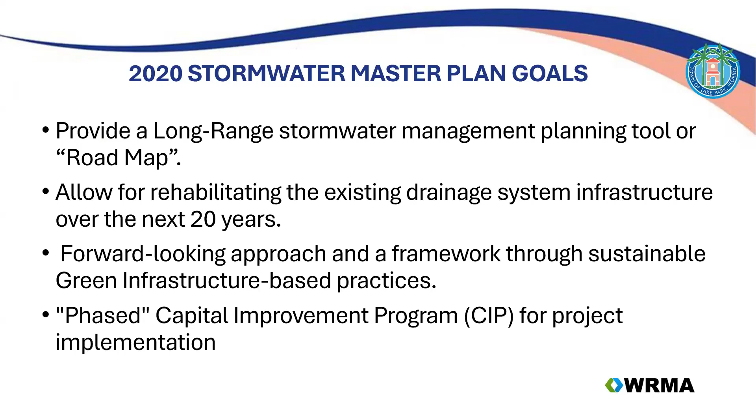Our Stormwater Master Plan aligns with the EPA's G3 initiative, which stands for Green Street, Green Jobs, and Green Town. By investing in Green Street, we modernize our stormwater infrastructure and create new opportunities for economic growth through green jobs. These jobs focus on sustainable practices like eco-friendly engineering and landscaping, which helps drive initiative within our community. Furthermore, the green infrastructure we're implementing will make Lake Park more resilient to climate change, preparing us for the impact of rising sea levels and more intense storm events.

One of the biggest challenges we face is funding. With a small population of about 9,000 residents, our ability to expand the stormwater utility fee is limited. Our general budget is already allocated to essential services like community services, library, and infrastructure management, so we need to be creative in funding stormwater improvements. To address this, we are exploring external funding options, including state and federal grants. By doing so, we can finance critical stormwater projects without straining the town's budget, allowing us to meet our goals despite the constraints.

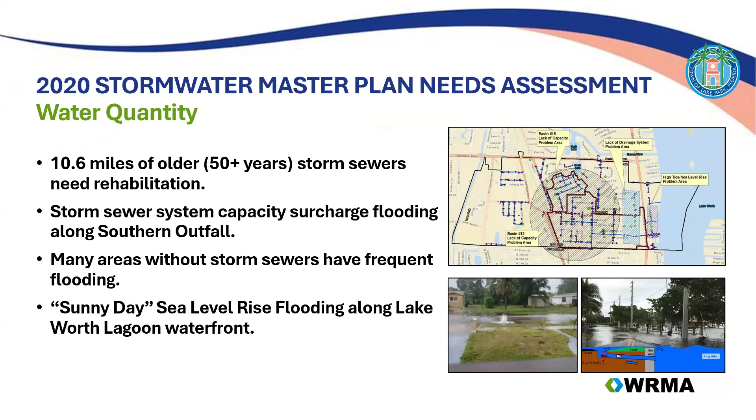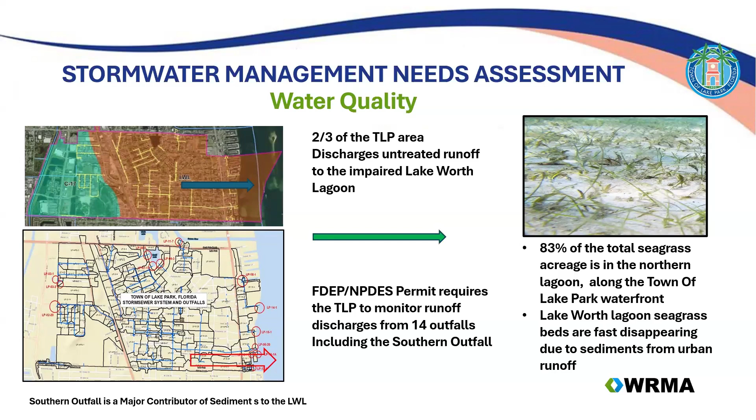The town belongs to the Palm Beach County NPDES MS4 group, has 14 outfalls that are monitored, and the town has to file a report every year.

So now let's take a look at other issues like climate change. As I mentioned, the town is already impacted by sea level rise, so this is very important. The prediction by the compact, the 4 counties in South Florida plus NOAA, indicates there will be a 42-inch increase in sea level rise by the year 2070.

The predictions are that by about 2035, there will be an increase in precipitation intensity of about 20-30%, roughly anywhere between 2 to 7% per year.

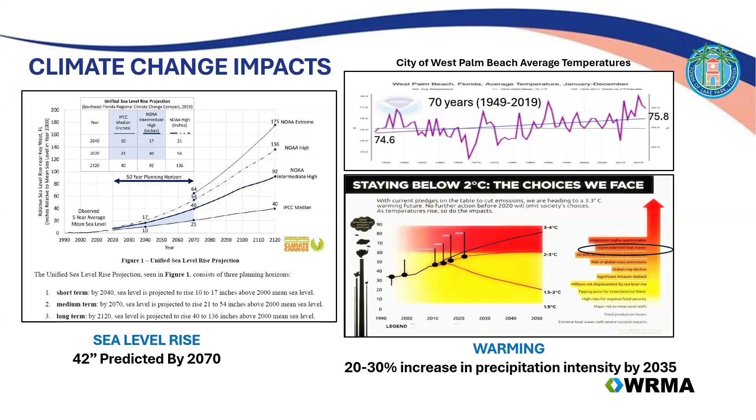Why is this important? Because in any stormwater master planning design, you take into account the flood level of service. Typically this is a 5-year, 24-hour storm for most municipalities. For Town of Lake Park, using the NOAA Atlas 14 database, we see that this is 7.47 inches.

Now if we were to take the projection for the next 11 years to 2035, let's say at 7%, the 7.47 becomes 8.24 inches. Looking back at the table again, that becomes a 7.5-year, 24-hour storm event, meaning that basically every 10 years your design goes up 2.5-year frequencies.

That means by 2040 and 2050, you'll be designing for the 10 or the 15 year storm. Well, that means all municipalities would be upsizing frequently. That is unaffordable and unsustainable.

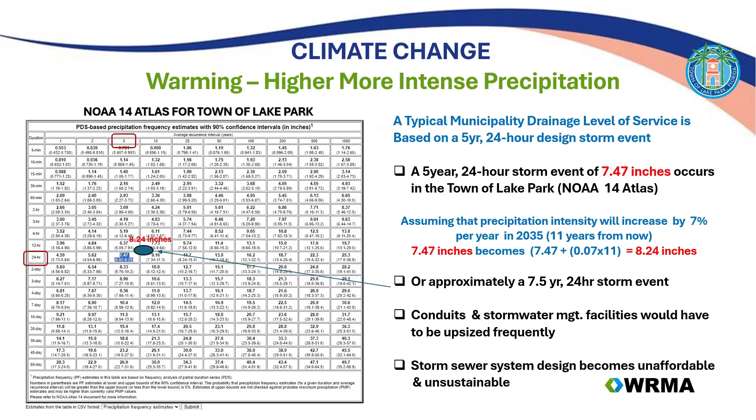So what we proposed at the time was based on our experience with best practices in Maryland. Both Michael and myself had implemented green infrastructure for the Washington Suburban Sanitary Commission, WSSC, as well as DC Water, and we wanted to take some features from there and apply them to South Florida.

One of the things that caught our attention at the time was something that the Maryland Department of the Environment, MDE, is doing for development and redevelopment projects. They call it Sustainable Environmental Site Design, or ESD. The idea is to select a site, a small area within your project site, and retrofit it to a more natural condition.

That is done by targeting the rainfall to reduce the site's developed RCN, the curve number, from whatever it is to woods in good condition, let's say from 85 to maybe 65 or 55. You come out with a volume, and then apply green infrastructure, either on the surface or on the groundwater with biodetention chambers.

The idea is that if you were to do that on a watershed basis, you keep up with climate change and the precipitation increases. I've put a link to MDE at the bottom for those who want to learn more about the ESD approach.

Because the town had a difficult situation, they had no ability to come up with the funds to pay for upsizing all the storm sewers. We felt we could propose a sustainability approach that we were experienced with in Maryland, and because Florida has such good sandy soil conditions, it felt like the right thing to do.

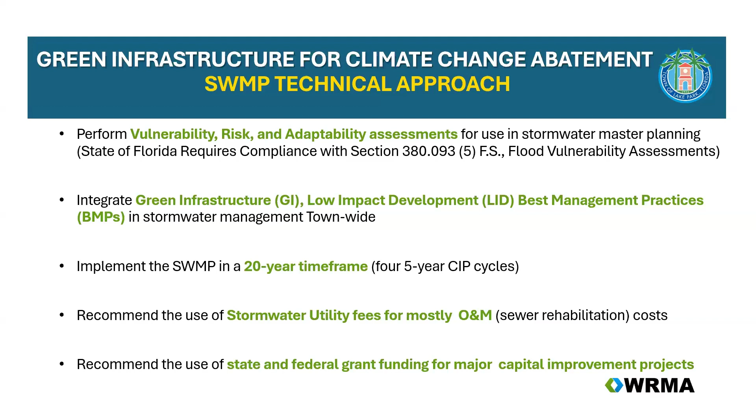So how do you go about implementing GI and LID BMPs for sustainability? It's a definition of green infrastructure, like Dr. B mentioned in his presentation—a small scale practice close to the runoff source. The whole idea with green infrastructure is to not let that rainfall that becomes runoff leave the site. The minute it leaves the site into the gray infrastructure—the storm sewers and the end-of-pipe system, pumps and detention areas—you lose half of the battle.

So that leads us into the flood vulnerability and risk assessment. In every stormwater master planning, you perform a level of service modeling analysis. But the difference with our approach is that you have to start with the vulnerability to climate change—as a function of climate change, assessing what sea level rise and increasing precipitation would do to your watersheds. Then once you know that, you apply it at the local level with nuisance flooding. This is incredibly important because small scale practice and nuisance flooding go hand in hand, and I'll explain.

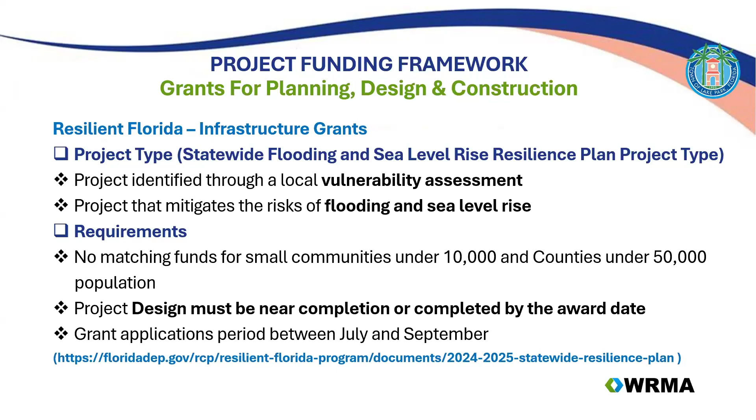Small communities under 10,000, like the town of Lake Park, don't have to match, in counties under 50,000. Also, the project design must be near completion or completed by the award date. As I mentioned, it was created by legislation in 2021 to protect coastlines and shores and as a defense against sea level rise, but it also applies to any flood and sea level rise issues you may have statewide.

Again, hundreds of projects have been proposed. In the 2024-25 cycle, 196 projects were proposed and deemed eligible at a total of $1.8 billion, of which almost $900 million were approved. This is a very reliable source for implementing a plan like this.

So let's go and see how the town did this. I mentioned the three levels: vulnerability, nuisance flooding, and flooding. Let's start with the first - how did the town go about climate change? The town got a $75,000 coastal resiliency grant to perform a sea level rise assessment, and we hired a surveyor to assess the elevations on the 0.8 miles of seawall, the structural conditions, and what it would cost to replace it.

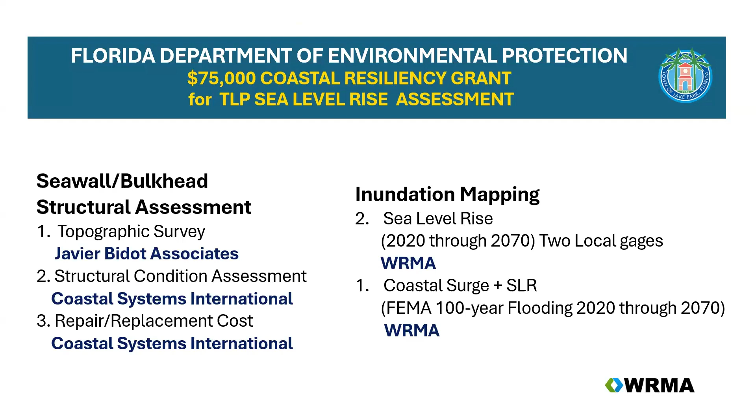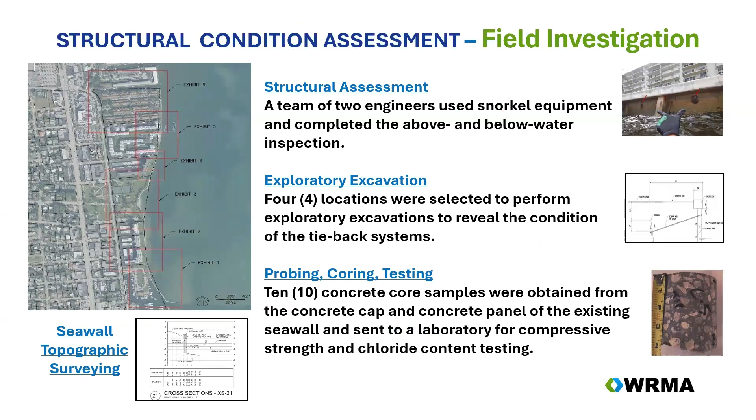We also performed inundation mapping along the lines of what the state requires right now, from 2020 to 2070, using two local gauges and merging coastal surge with sea level rise. As for the seawall, they did a structural assessment, exploratory excavation, and probing, coming out with a cost that I'll mention later.

We also comply with Section 380.093, the flood vulnerability assessment. This is very specific - it requires two local sea level rise projections, called NOAA Intermediate Low and NOAA Intermediate High, used for two planning horizons: the year 2040 and 2070. It's changing this year - I believe it's going to 2050 and 2080.

We did that, and what we came out with is we combined the two sources. The typical approach used for coastal surges - you're not going to go with a model, because that's done by other consultants using much larger budgets.

What you do is take the static water level of that incoming wave - in other words, discount the velocity side of it - and add that to the sea level rise to make a projection of how far inland that would go. You can see from the map on the right that it will go a long way, all the way past US 1 into 1st and 2nd Street, and on the north, all the areas around South Lake will be flooded as well.

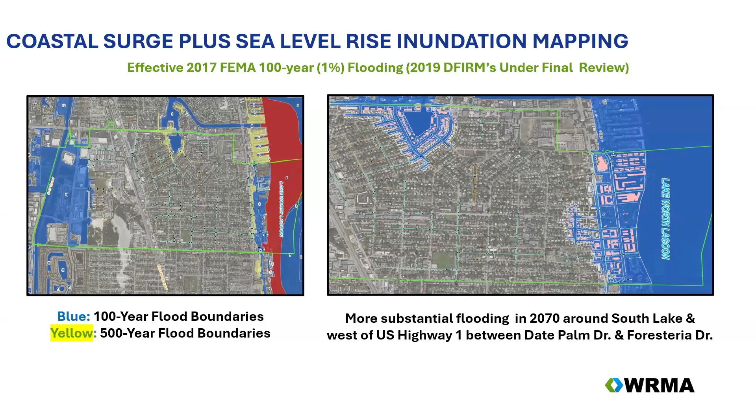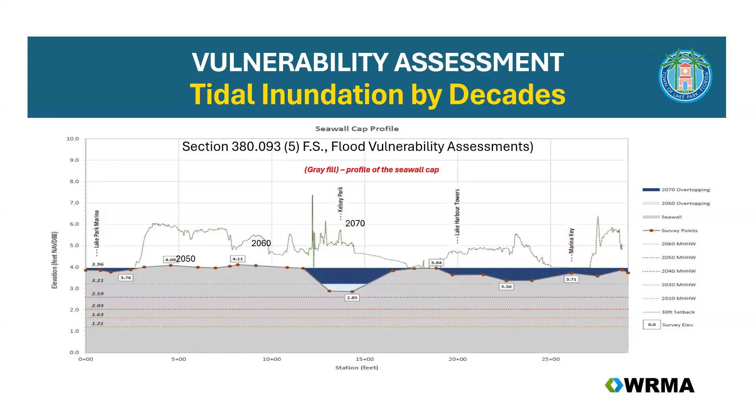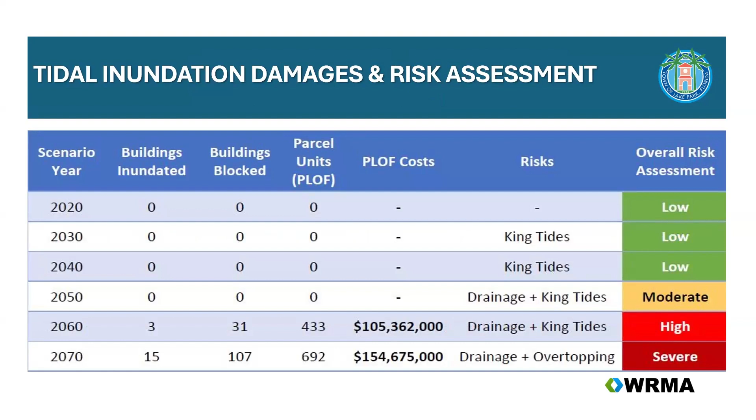Then you have to put this in terms of how much damage there would be, what the risk is, and provide the overall risk assessment from low to moderate to high to severe. Once you do that, you're required to come out with an adaptation pathway - what are the options you have?

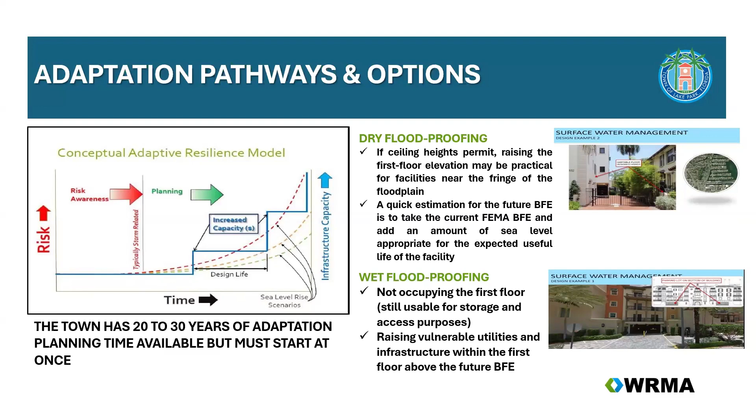The town has another 20 to 30 years until 2050 to start doing something, but they already started. You're going to elevate the first floors and make parking lots, maybe elevate the seawall - most people do that. In terms of stormwater master planning, how do you address all those 14 outfalls that go to the lagoon?

You put floodgates, and if you put floodgates, you need pump stations - sea level rise pump stations. The town has already done that. The two required: one to the north was done as part of the Lakeshore Drive Drainage Improvement Project, and the one to the south will be done as part of the Southern Outfall Phase 1 Priority Retrofit Project, which I'll mention in a second.

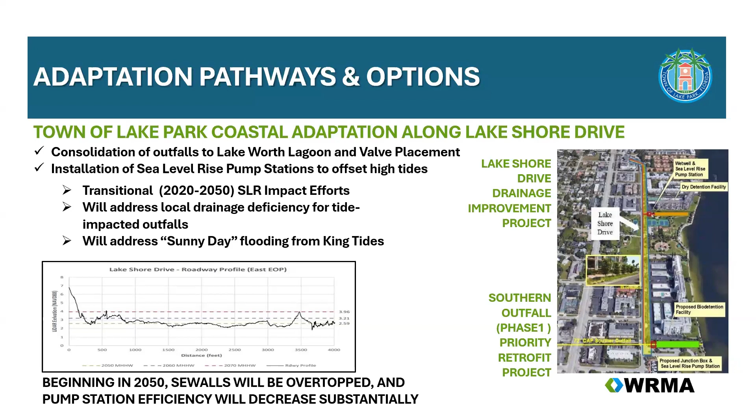But notice on the lower left that even by 2050, that will not be enough, meaning the town is going to have to elevate Lakeshore Drive to stay dry.

So now let's address the other approach in the level of service, which is the local level nuisance flooding. This is the key of the program because small scale practice and green infrastructure and nuisance flooding go hand in hand. I'll also address the third one later.

When we started the project, one of the tasks in Stormwater Master Planning was outreach and communication. This task involved forming a 5-member steering committee made out of the town manager, the public works director, the WRMA staff, and stakeholders, because we needed to find out what people know about sea level rise, green infrastructure, and all those terms that get thrown around but not really put into practice.

We sent surveys, and it was very informative, both to the managers, the commission, and to us, as to the level of learning that needed to be done.

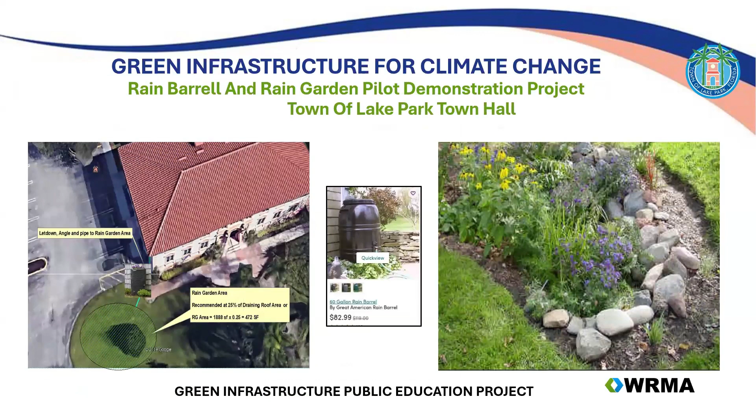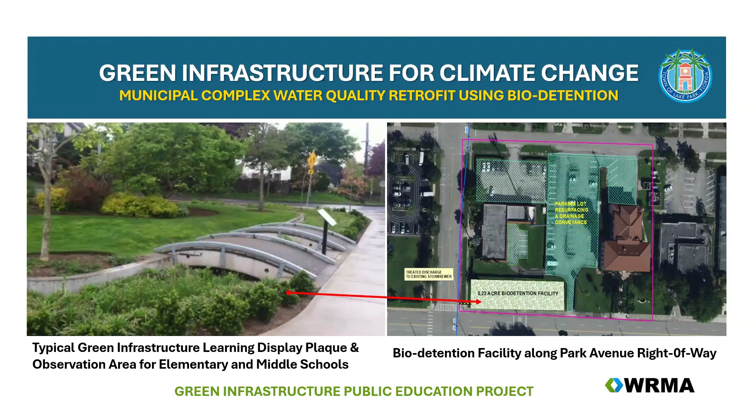What came out of that were recommendations to implement projects. One is in the works: take the building where the commissioners meet and put rain barrels, bringing that to a rain garden right in front by Park Avenue, where people will see it. Another is to take an area in the municipal complex fronting on Park Avenue and create a biodetention facility with a learning display and observation area for elementary schools and children, even high school, to learn about green infrastructure and sustainability.

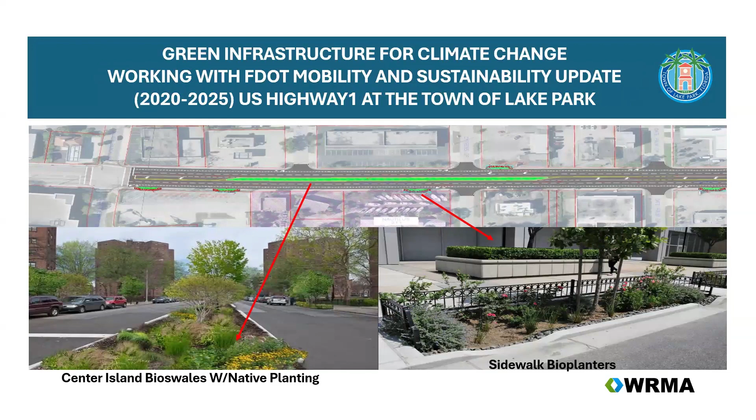We're also working with DOT. They're doing a mobility study improving US 1 through the town, and we're talking to them about putting bioplanters on the sidewalks and bioswales in the through lanes.

So here comes the key: how do you implement green infrastructure townwide and make it effective? I mentioned earlier that the key is not to let the runoff come off the site. So if it does come off the site after you put in bioplanters, it's going to hit the road and try to get into the system.

So the idea is to try to do something in there. What we came out with is the ability to convert 10% of the impervious areas in right-of-ways and parking lots to green infrastructure over the next 20 years, to offset this warming trend. We figured out that if we took 5% of the right-of-ways as a target, we would get there, and we then modeled that to see if it could be done.

What we propose is not just to use the swale and convert it to a biocell, but convert it to a hybrid biocell, something we had applied in Maryland. We thought it would be really useful in Florida because unlike Maryland, where they have a lot of clay soils, here you're underlain with a tremendous amount of sand, especially in Central Florida. This will work extremely well. The idea is to capture the first inch of runoff, or a good percentage of it, and let it infiltrate to the water table.

When you do that, you're also offsetting the discharge to Lake Worth Lagoon, which means improved water quality. We modeled this using the SIMPLE NPS GIS-based model, the SWAT distributed model for pollutant loadings, and the UCF BMPTRAINS tool to assess the effectiveness of those BMPs. We found that it would decrease sediments over the 20-year period by 22.2% into the lagoon. The Palm Beach group and the Lake Worth Lagoon people were ecstatic about it, and they really liked the program, along with all the other pollutants that would be precluded from reaching the lagoon.

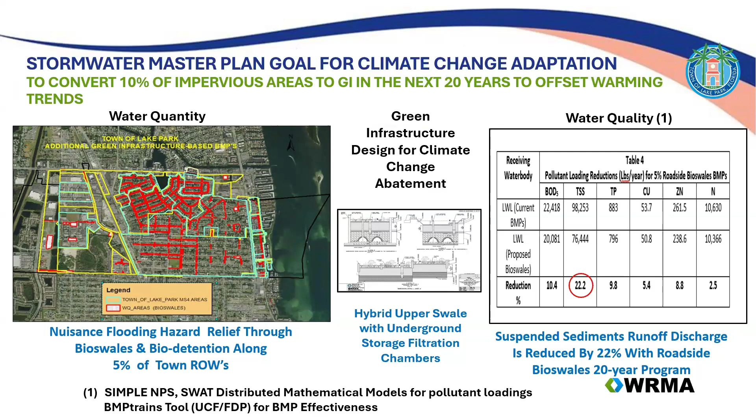As Dr. Bean indicated in the previous presentation, 90 to 95% of all storm events in Florida occur between 0 and 2 inches, most of the time about 1.5 inches. You get a 10-year or 5-year storm once in a blue moon, but the frequent events are right there, less than 1.5 to 2 inches.

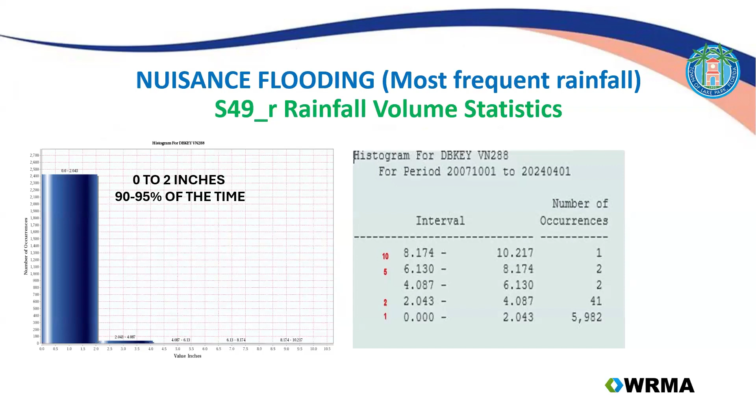So how then do you bring the concept into practice? We strongly recommend that you use a 2D modeling approach. 1D links and nodes doesn't cut it. You have to do your profile on plans.

When you see it in 2D, you take a high resolution, either mobile lidar with mesh or high airborne lidar, and create a DEM and issue that to the model.

It will tell you for the 0.5, 1 inch events, where is that nuisance flooding occurring. You can see from the map it's very clear. And we knew already, for example, that along 2nd Street, it was very clearly a place where we needed to do that. So when you do the modeling, you get with your stormwater superintendent, John Wiley from the town, and ask where is your documentation of this nuisance flooding.

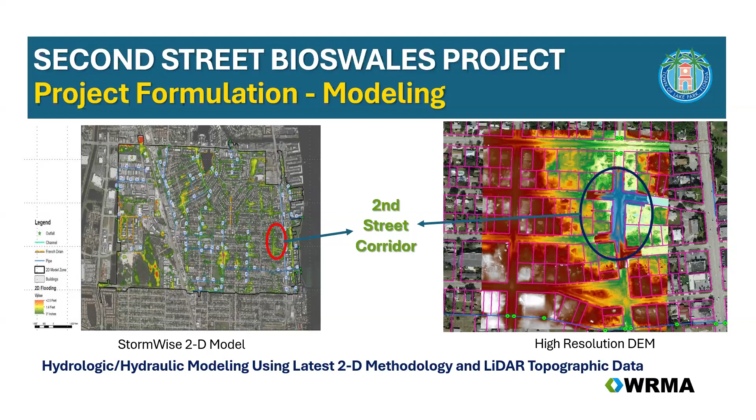He came out with about 32 locations. So right there, you go from mathematically supporting your technique to documentation of where it happens. And then you have a list of projects you can use in the future, small scale projects to implement green infrastructure. Now let me go to the flooding level of service, the basin level of service.

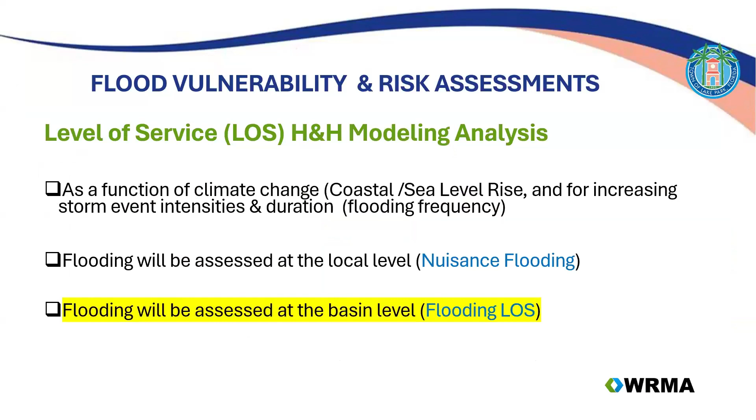A lot of engineers believe that you cannot use green infrastructure for larger projects. I don't quite agree with that, because if you selectively apply it, it would work. Take the case of the southern outfall.

This is roughly about 500 acres, and they have a north and a south tributary. They basically join right at 6th Street to go out into the main trunk and go from there to Tidewater, but they can't get there because of the improper sizing and the issues of surcharges. So we came out with basically a 3-level approach, 3 phases within one project.

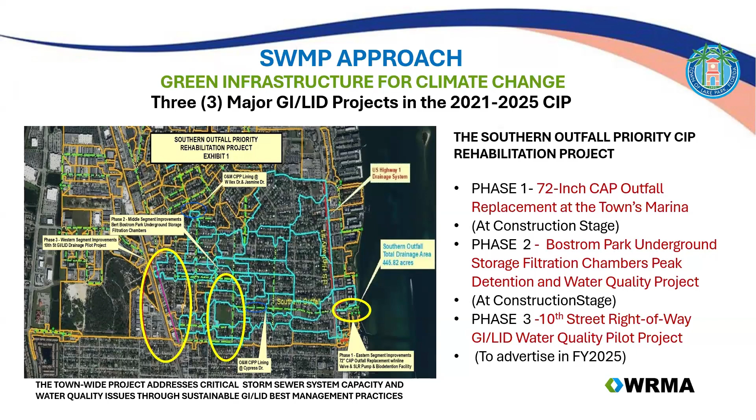One at the marina, at the outfall discharge, one in the center, which is Bostrom Park, which Michael will address in more detail, and one upstream of the watershed, where there's no drainage for a right of way. I'll quickly mention this.

Here is the marina where there is a 72-inch CAP aluminized pipe that is deteriorating and needs to be replaced. It's being replaced as phase one of this project with two 60s, and they're going to have exfiltration trenches along the US1 area, and very importantly, a future sea level rise pump station.

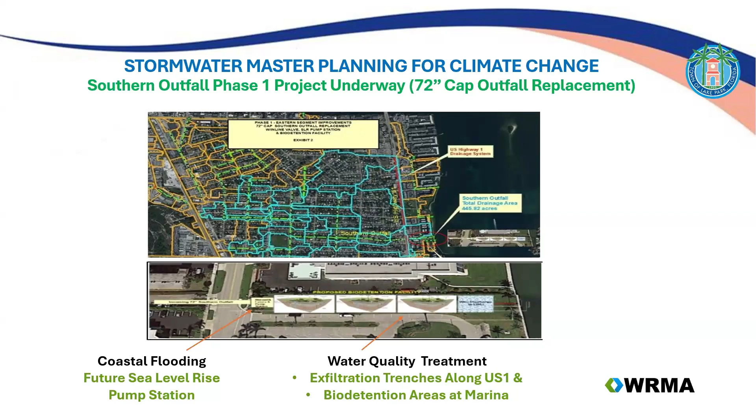So what do you have? You have the three components: water quantity, water quality, and sustainability, because again, you're offsetting sea level rise.

The second project is Bostrom Park, which again, Michael will provide more details on. Basically here, you can see from the pictures that most of the northern tributary gets stuck basically along 6th Street. It cannot get to the outfall. So we needed to improve that connection and put it underground.

There were no locations in the town to put any kind of surface detention. So on the ground of the park, the 3-acre park, was the way to go, with large chambers. And there comes the green infrastructure sustainability approach.

Detain the peak flood by about 20-30 minutes. Let that peak pass by on the ground, and infiltrate that volume to the ground while it's doing so. And you're also doing what? Water quality - you're preventing that from reaching the lagoon. So again, it has water quality and sustainability.

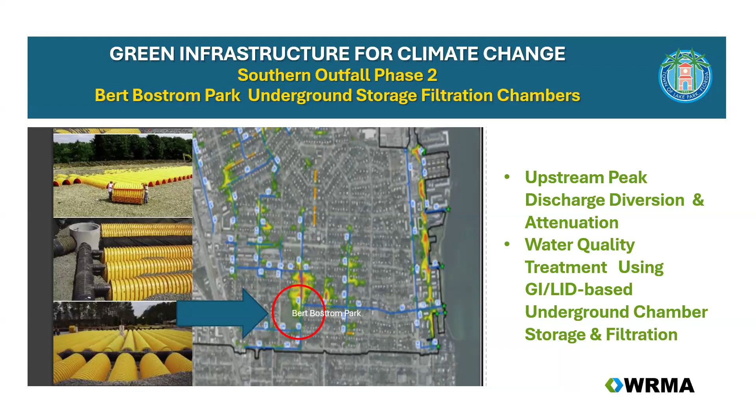Basically, all the entrances to commercial communities would be pervious pavements, and then we would have some bio-detentions going into these chambers. Again, you are now dealing with a situation where you have all three components: water quantity, water quality, and sustainability.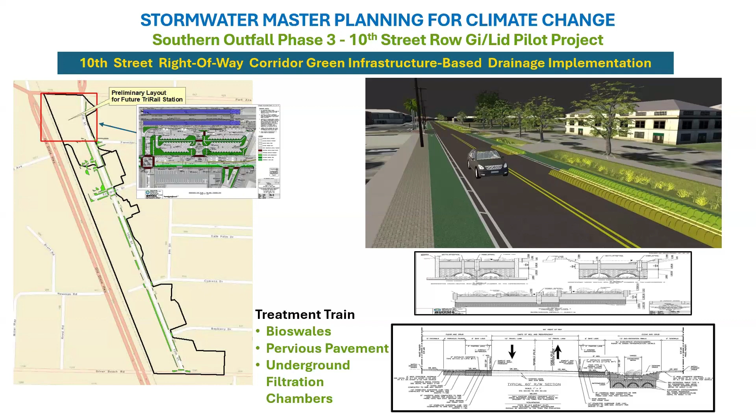Before I turn it to Michael, I want to indicate that there are some key individuals, including Jamie Morales, the capital project manager, and John Wiley, the Stormwater Superintendent for the Stormwater Master Plan, who have been instrumental on the implementation side of this program.

It wouldn't have happened otherwise. It's great to design it and put it on grants and paper, but another thing is to implement it. They're doing a great job about that. So now I want to pass it on to Michael.

Thank you, Raul. Slide please. Yeah, so as Raul mentioned, one of the things the town of Lake Park is trying to achieve is converting 5% of its right-of-way into green infrastructure.

In this case, the project that I'm going to talk about here is bioswales. This street was a street that we had identified in the two-dimensional model as having a localized nuisance flooding issue. There was no existing stormwater infrastructure within 3 blocks.

The nearest connection point would have been the southern outfall, which, as Raul previously mentioned, is an outfall that's already at pretty high capacity, and we're not looking to add any additional flow into that outfall. In this particular case, we looked at this area and found that this section of 2nd Street had a lot of extraneous asphalt that was obviously increasing the impervious area and causing a lot of nuisance flooding.

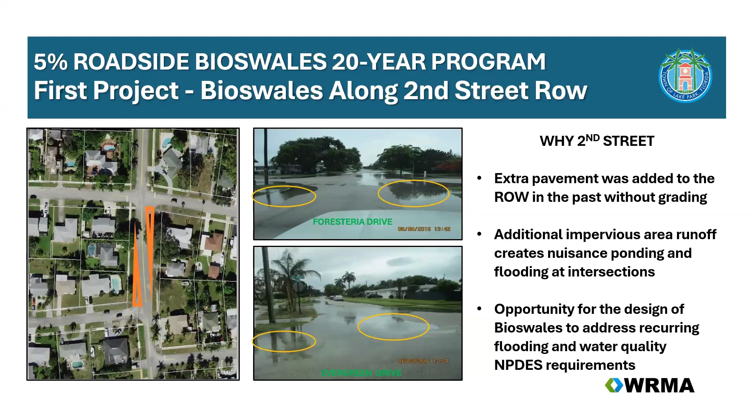So we looked into that, and obviously when you do engineering in an older town like Lake Park, one of the first municipalities in Florida, you have utilities that were installed a long time ago. So when you're looking at doing a bioswale project in a town that's been around for a long time, you do have to think about the utilities — water, sewer, even communications — because with bioswales, you're creating depressional storage on the roadside, and dropping those grades will obviously reduce cover over any utilities that may be in the right of way.

So in a bioswale project, it does benefit you to spend a little bit of money and time looking at those subsurface utilities and doing some test holing and investigations to ensure that you can execute the bioswale project without having to do really intensive surgery on the utilities.

So we looked at the easements, we looked at the utilities, and then we laid out those bioswales. Now we did have the benefit of having a very well developed two-dimensional model, so we were able to calculate the amount of runoff that we were looking to intercept and store.

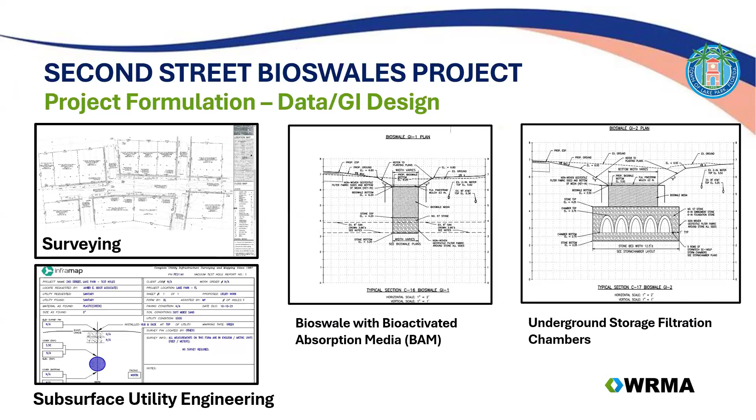We did have Cotleur & Hearing, a landscaping firm based in Jupiter, who supported us with the development of a landscaping plan, producing a rendering to assist us in the public outreach effort to let the community know what we are planning to do. As you can see here, they provided us with some 3-dimensional renderings and a planting plan.

One thing I would point out with plantings is that obviously you can design anything, but you do want to make sure that the plants — if you could please go back to that planting slide — you do want to make sure that you have the plants that you want available. What we found is not necessarily all of the plants we wanted or that were laid out were necessarily available.

For municipalities doing this in-house, there's a great resource available: the University of Florida IFAS Extension website, which has a really great resource for native plants. That's gardeningsolutions.ifas.ufl.edu. You can go there and get a lot of great information on native plants. Or if you're working with a landscape architect, they can select the right native plants for your project. Just make sure the suppliers who are going to be supplying the plants actually have those plants available.

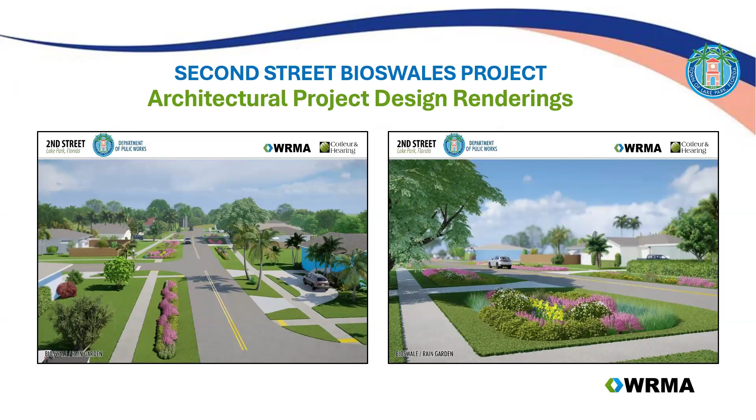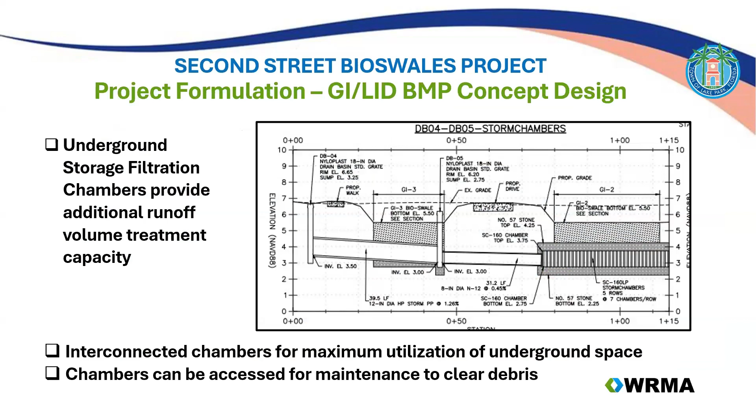These chamber systems, if you're familiar with them, typically work so that one of the chamber rows will have a woven filter fabric underneath it, referred to as the isolator row. That row typically receives the runoff first, and the purpose is to separate out all of the sediments coming in from those discharges. We had the depressional bioswale storage above that, which also helps with that. But you can have that additional isolator row if, for example, you didn't have the cover to do bioswales and just wanted this as a standalone storage solution—then you could add that isolator row and get that sediment removal.

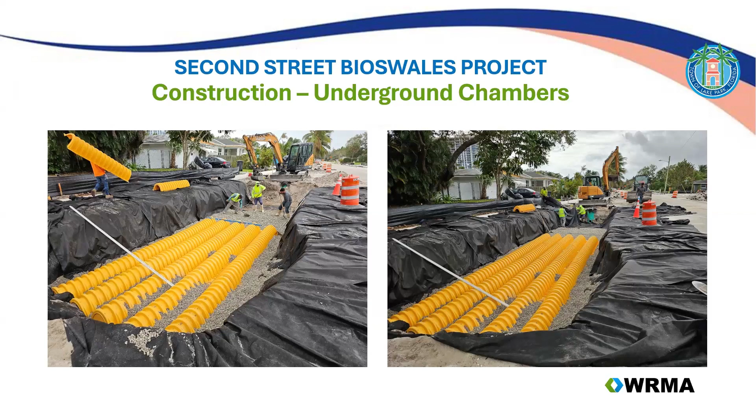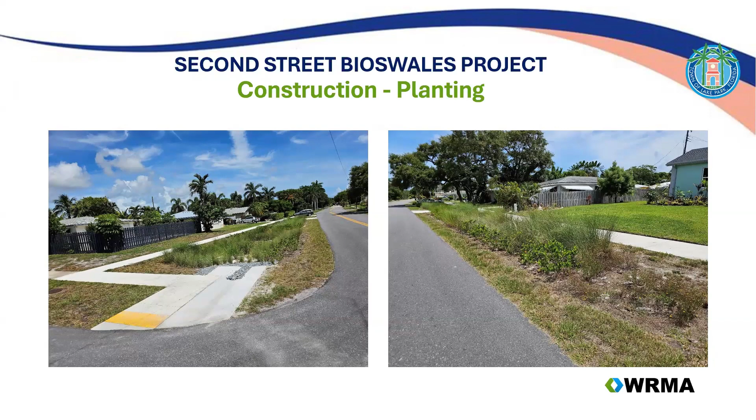Here's a finished shot of what these swales look like, from July, so it's hot and the grass is starting to brown, but the plants are doing very well. In one location, because we had eliminated so much impervious area, the runoff was concentrated into one location, so we added a little flume to prevent the sidewalk from getting undermined. You see this flume here with some decorative river rock, and that's working out very nicely. By all accounts, the bioswales with that supplemental storage have worked very well, pretty much eliminating the nuisance flooding with the series of larger events we've had this year.

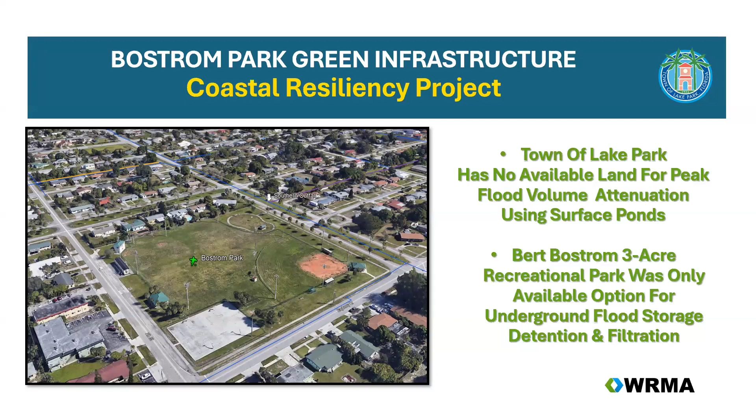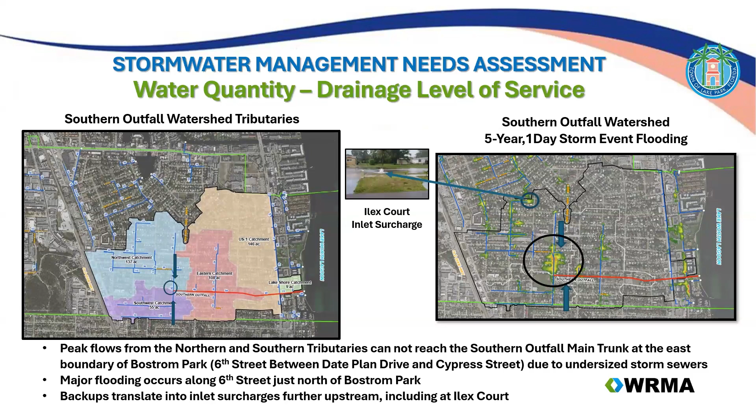Given that we didn't have a lot of options—could we do a pond? There's just no available real estate to do a superficial pond. We decided to try siting a subsurficial storm chamber on a much larger scale than what you saw previously on the Second Street project. These chambers we used, the SC 740, are about a 2.5-foot tall chamber. Because we had this very detailed two-dimensional model, we were able to identify how much discharge we needed to detain or infiltrate, and we came up with a layout using this existing soccer field. What's great about subsurficial storage systems like these storm chambers is you can get effectively the same type of effect a pond would have, but you don't have to change the land use.

So if you're a municipality and you have large green spaces, whether it's a park or a soccer field, this is a potential option for you to look at creating a facility.

The one thing you do have to factor in, though, is that while the land use might stay the same, you can pave over these chambers. You can do parking lots, paved surfaces, sidewalks, obviously grass. You cannot do building structures. Once these chambers are in place, you will not be doing any vertical structures over or close to the perimeter of the chamber systems. So that's something to keep in mind if you have future land use plans for certain areas - you can't do buildings on top. But pavements, flexible or rigid, are not an issue as long as you have the minimum cover.

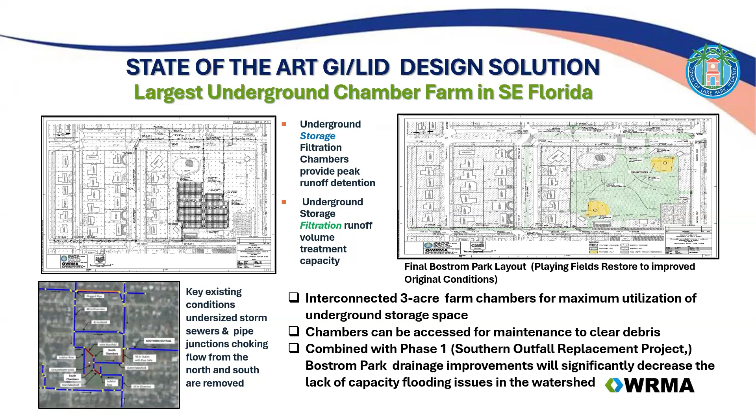So with the storm chamber system, this is sort of a very early conceptual model of the utilities - an X-ray vision view, if you will, of what it would look like if you could see through the ground. You can see we've got the chamber system laid out. This system is large, so we did have those isolator rows I mentioned with woven geotextile fabric, which serves to separate sediments from the water column before it overflows into the other successive chamber rows. You'll have an inflow structure on one side and an outflow structure on the downstream side, usually with a weir set at a control elevation determined by the engineer.

But in this case, the system we're doing, which is actually in construction as we speak in Lake Park - sorry, if you could go back one slide - that system is a 1.6 million gallon system, which is just under, I believe, 5 acre-feet of storage.

And that's in construction as we speak. Once done, we'll backfill, regrade, and it'll go back to being a soccer field, and no one will know what's beneath their feet. But effectively, it's a great way to provide some storage capacity, some sediment removal. We're trying to remove whatever we can before discharging into the southern outfall and into the Lake Worth Lagoon.

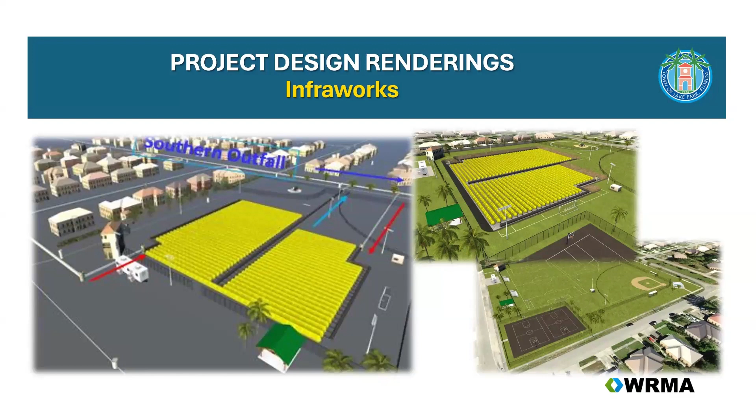And we are in the process of tying that into the existing stormwater system and providing relief to some measure of that choke point.

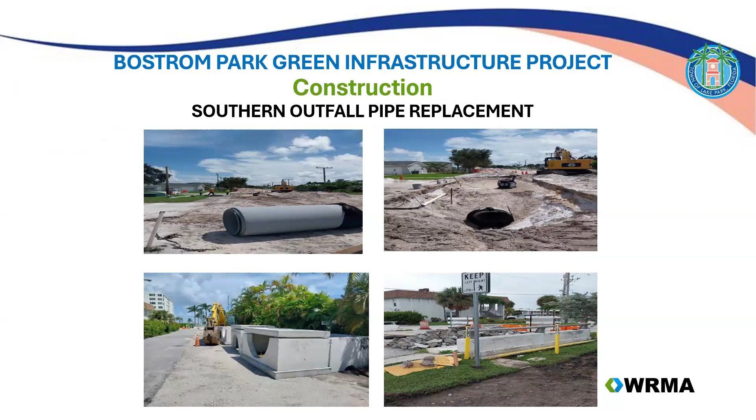So the last project, as Raul mentioned, the one that's currently also in construction, is down at the Lake Worth Lagoon seawall. This is the southern outfall project, effectively replacing an aged 72-inch corrugated aluminum pipe with dual 60-inch RCPs, as well as some additional green infrastructure supplements to provide some future capacity, as well as a future pump station, as Raul mentioned. So those are some actual projects, actual applications of GI that are actively ongoing in the town of Lake Park. And I'll pass that back to Mr. Willie from the town of Lake Park.

Thank you, Michael. I see we're running up against the clock a little bit, so I'll just briefly discuss project funding through grant assistance. For the town of Lake Park, project grant funding is key in providing the affordability for the town's needed infrastructure projects.

Fortunately, grant assistance for infrastructure improvement is available through several agencies, both state and federal. As Raul mentioned earlier, this grant assistance is available for both design and construction activities. One thing about the grant application and award process - it requires patience, because there's often several months between submitting the grant application and any kind of notification of pending award or additional information needed.

However, the process is ultimately about compliance documentation - starting from project advertisement, procurement solicitation, vendor agreement execution, construction performance, and final project closeout. It's all to ensure that grant funding is managed and allocated in compliance with relevant regulations.

Michael and Raul mentioned the Second Street bioswale project. For this project, the town was awarded a design grant through NOAA. This grant award led to a second grant that allowed us to complete the design and construction work for this project. As Raul previously explained, the NOAA design grant allowed the town to develop 30% plans, which were then used to prepare an application for construction grant funding.

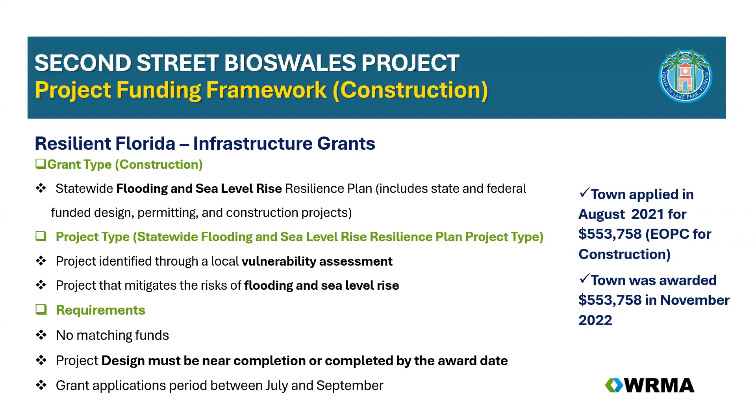It was the partially funded design grant and the fully funded construction grant that allowed the town to address an important infrastructure improvement with limited town capital investment. The time frame for securing the design grant to completed construction was roughly a year and a half, and the construction for that project is now complete.

Also in discussion was the Bert Bostrom project, another opportunity for grant funding to address a needed infrastructure improvement. Like Second Street, the town secured a coastal resiliency grant to develop conceptual design plans used in applying for additional funding. That application resulted in an $11 million grant through Florida Commerce, covering completion of the design plans and construction costs. The grant agency's management and compliance obligations are robust, but they ensure funds are allocated appropriately. We've met our advertisement and procurement requirements with the grant agency, and this project is currently in the construction phase.

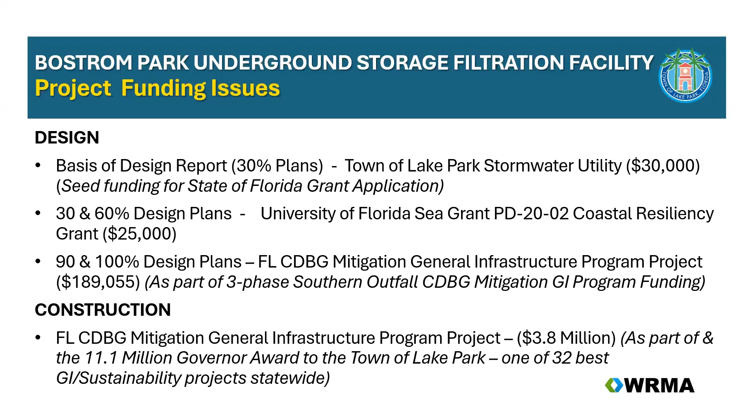So with that, Raul, I'll leave it to you for a couple of closeout comments before we address any questions.

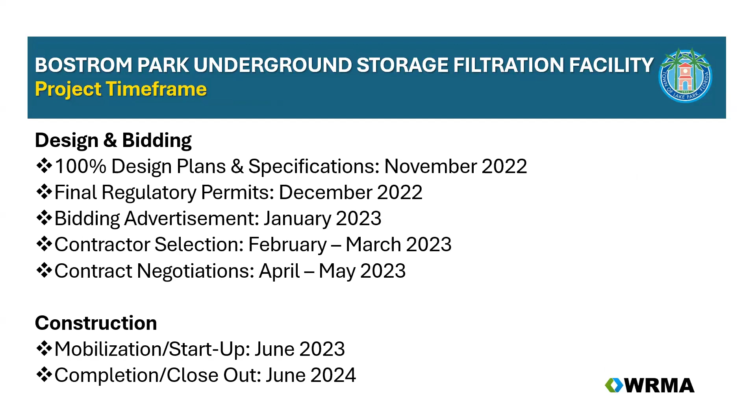I have to mention a couple of people. Roberto Travieso succeeded Richard Shirley as Public Works Director and was instrumental in moving this project along. And Merrill N. Wright, the grants specialist at the Town of Lake Park. If you don't have one, you need one like her, because it takes a grant writer with a lot of experience to put all this into paperwork. It can be overwhelming sometimes, but it's worthwhile when a town of 9,000 people can get $11.1 million. So with that, I'll open it to questions.

Raul, we had one question about the design event for the chamber system. For the large system, the Bostrom Park project, the design criteria was SFWMD for the 25-year, 72-hour storm. For the smaller system, the nuisance flooding project, we were looking at a much smaller event.